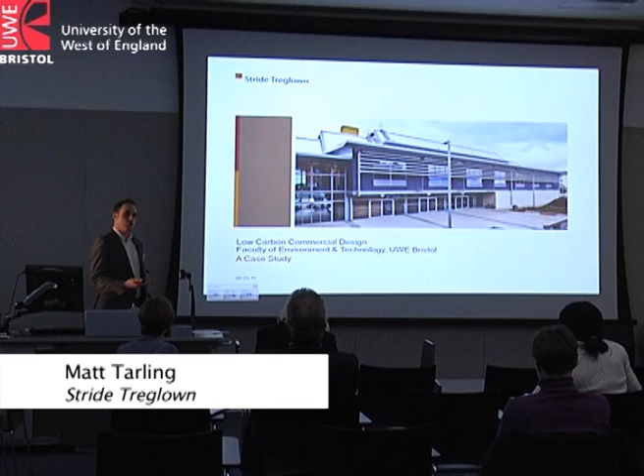This is a quick run through of the building and our experience delivering it in the context of current legislation, the budget constraints we had on the project, the time constraints, and also some of the constraints we had working with the university, not just the faculty itself, but the estates team as well, and some of the issues that arise from there.

So I'll do a quick run through. I felt it was worthwhile doing a run through the whole process so we could touch on some of the issues. I won't labour the point on too many of these, and at the end I've got some lessons learned that we're taking across into commercial office developments, and some future thoughts as well. Richard's actually covered some of what I was going to be talking about, which has given us a good intro into this particular talk.

The context here is that this is a building for the Faculty of the Environment and Technology. There's a lot of students here, and as well as housing the Department for Planning and Architecture, it was going to house the Product Design School as well. So a slight twist upon the types of students that were going to be using the space.

The site, Richard's talked about that to some extent, but really that sort of context we were dealing with, the mixture of buildings on the campus itself, the poor quality of some of the external environment, and some of that disjointedness that exists on the campus as well.

And clearly you can see that context having changed significantly during the time that the first phase was built, with all the student residences running around the site.

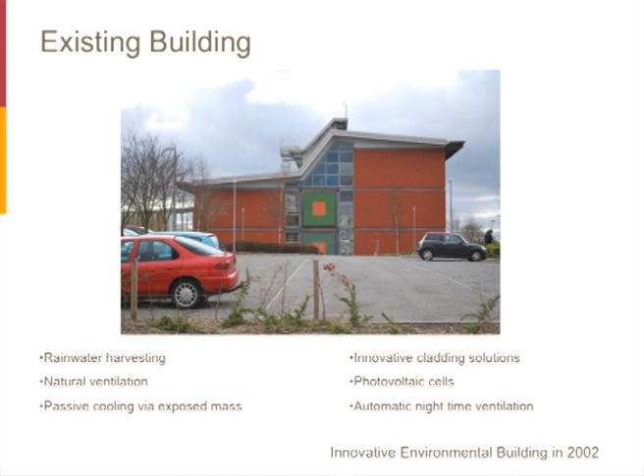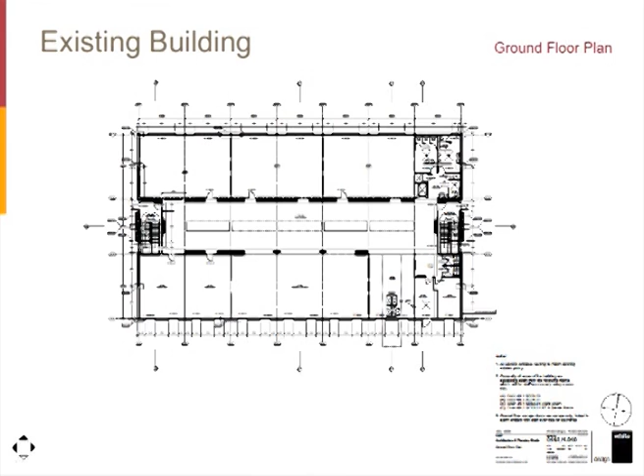There's a couple of sections through the existing building, just showing that atrium space that Richard was describing earlier, and that very, very simple plan, with a staircase at each end of that atrium space, light coming down into that central atrium, and then the bridge link coming through into the building.

One of the key things really was how you enter into that existing building and how we wanted to develop that as well. So I'll talk about that in a moment.

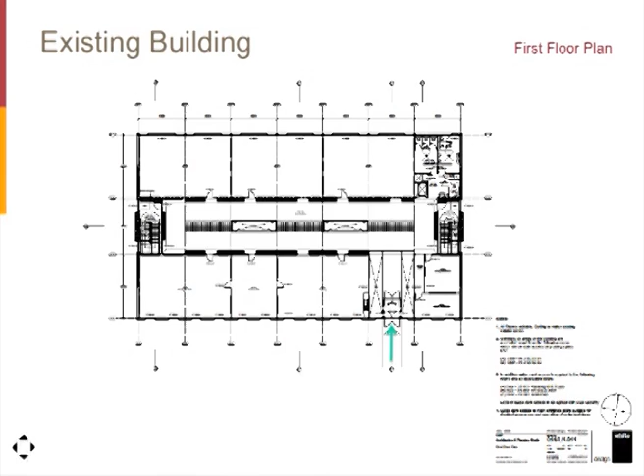So this just takes you up through those floor plans, and you can see that connection back through to the ground floor plan, and then the connection from the upper levels down through the atrium space as well into that large common area.

So just a little bit about our appointment and why we ended up designing the second phase building. There's an OJEU process for any publicly funded projects, as most people in this room know. The university has a framework of architects. We're one of 7 architects on the framework. White Design are not one of those architects. It went out to a mini tender bid to all 7 architects.

We responded to that with a team built up of consultants from the framework. We then submitted a proposal for that, attended an interview, and were successful getting through to that final stage. We were then appointed via various different forms, but that was really via the main framework, and the university uses the Scala form of appointment, which is very specific about the types of services they were looking for from us.

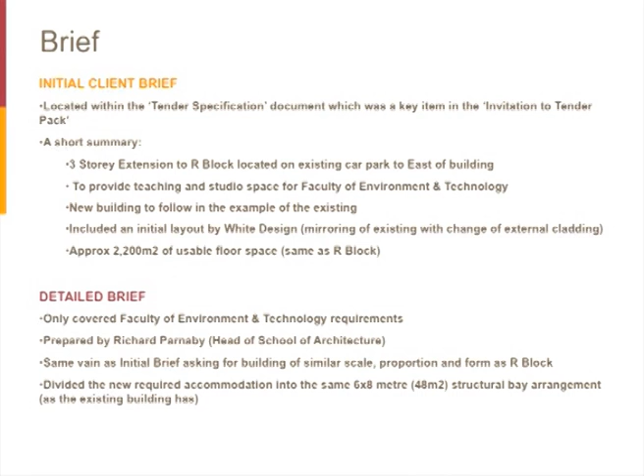Just coming onto the brief, the original client brief was very much about a replication of the existing building across to the site when we first bid for the project. As we got into the initial discussions with Richard and the rest of the faculty team, it became clear that it wasn't just a building for the School of Architecture, it was also going to include Product Design.

There are requirements for a lecture space, there are requirements for a cafe area. We started looking at some of the briefing issues as well about how the building could be knitted into the landscape.

That in itself then started to generate a change in brief, and started to develop some of those key issues around the energy and water strategy, trying to use the principles of lean, clean and efficient, and looking at opportunities to push new technologies the university hadn't used before that maybe could be used on future developments on the campus.

Also looking at the opportunity to use different materials on the building, so again there could be this compare-contrast aspect. And then there was also this aspect of the ability to learn through the building.

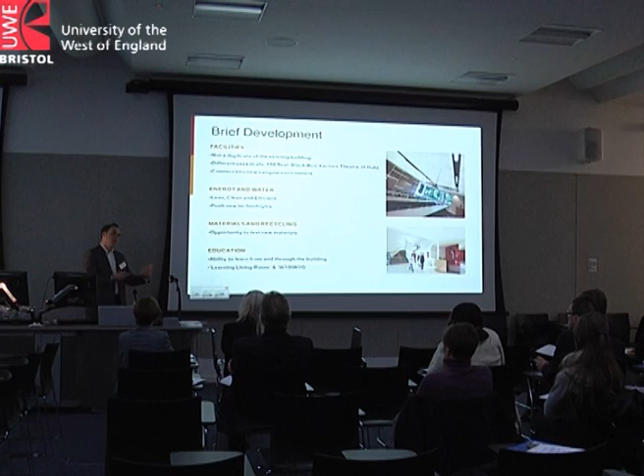Richard was very keen, as were most of the faculty at the time, to see whether we could actually construct the building out of a different frame solution - maybe this could be a concrete frame, compare-contrast to the steel frame next door. There were various reasons why that couldn't happen, but there were other opportunities for us to test some of those principles.

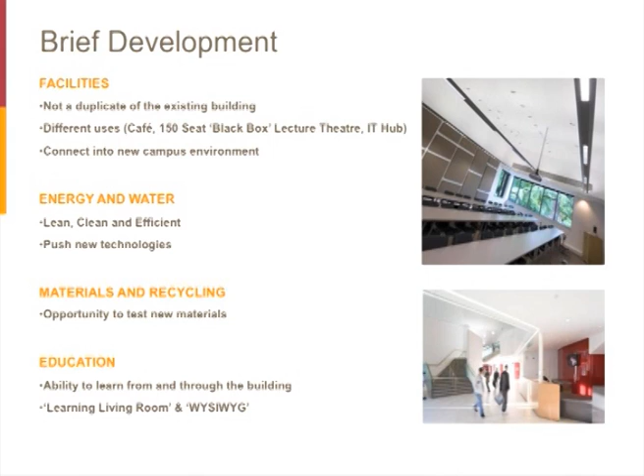That ability to learn through the building was going to be key, creating this learning living room area where more informal teaching and learning could take place. And also this principle of what you see is what you get - really stripped down building finishes throughout, so it's very clear how the building's constructed, how it's ventilated, and how the services work.

Clearly, from 2002 to when we started designing this building two years ago, the legislation context has changed significantly. Part L has moved on a couple of iterations, BREEAM has come into much greater prominence, the EPCs have come about, and WRAP as well, in terms of the recycling aspect, has risen in prominence - maybe not to such an extent as the other issues, but still something the university at an estates level were very keen to look into and understand.

So just briefly onto the site analysis - I think an awful lot of this we've covered already, but as Richard said earlier, the context changed from when the original building was opened to when we came to the table to start looking at the design, looking at those connections across the campus, and really starting to look at ways in which we could address the entrance to the building.

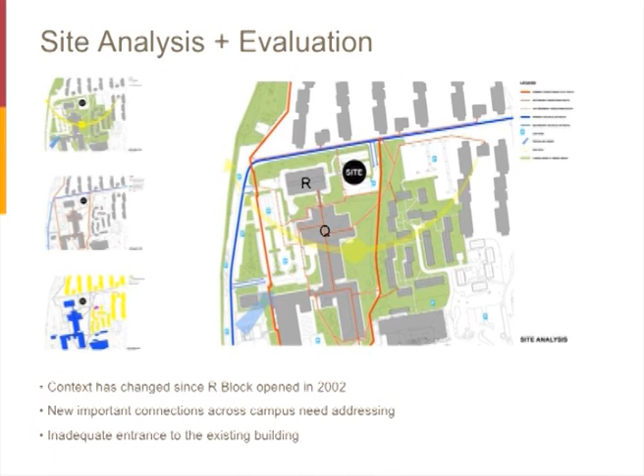When the building was originally designed, it was very much seen as an extension to Q Block, with that entrance coming through the bridge link in at first floor level. During conversations with various other people in the university that used the building, they felt the existing R Block was a little bit difficult to enter without feeling like you were straying into territory that wasn't your own, and part of that I think was coming across that bridge and landing in a new facility.

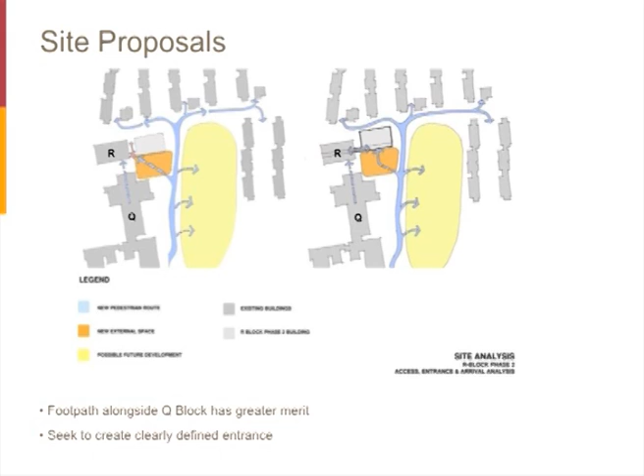So we wanted to look at a way of integrating the building within the landscape to a greater extent, looking at using the footpaths that go up the side of Q Block to a much greater extent. That drove us on to starting to look at the building orientation, how that building would work, and how the connections between the new building and the existing building would work - what were the opportunities there.

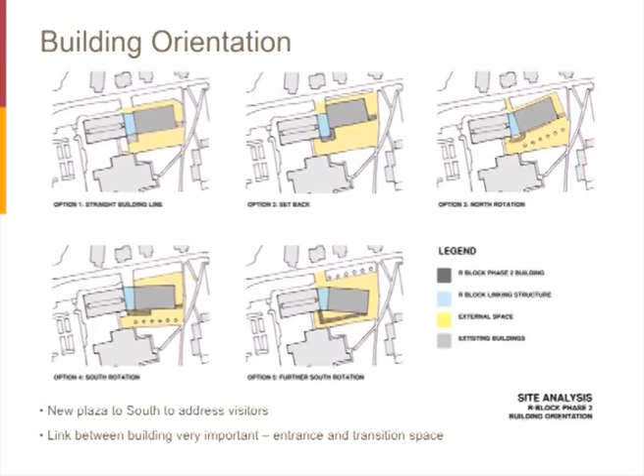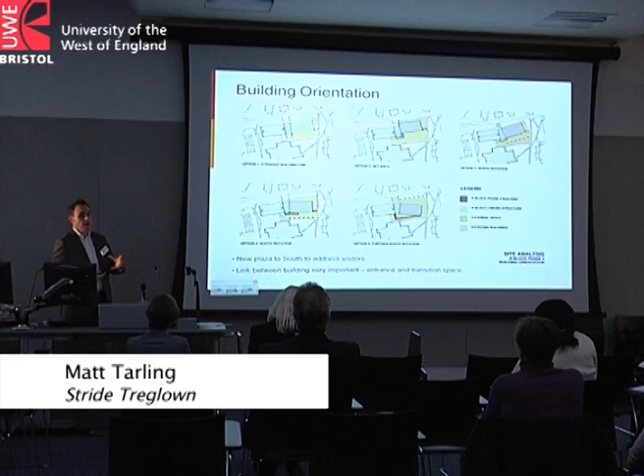We were looking at this opportunity to create a new south-facing plaza for the students, not just for this facility but for other users around the facility as well, and this glazed link between the two buildings that would allow a route through from the student resi into the plaza, then up some steps and back along into the rest of the campus, trying to knit the building into the rest of the campus.

So just very quickly, I'll go through the key stages of development for us. There were a number of iterations we went through, looking at different formats - the studio proportions and principles had really been well established on the first phase. Justin will talk a lot more in the M&E session about some of the principles, but at a very early stage we were really starting to look at how we could ventilate this building, how we could heat it, and what technologies we could start employing.

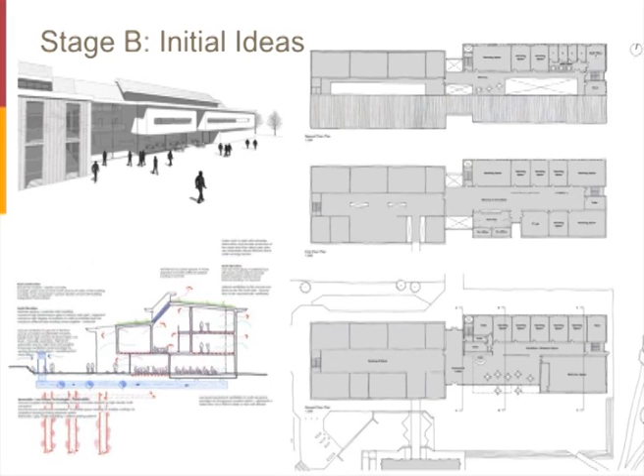And you can see from the section we were starting to look at whether sedum roofs were appropriate, how the ventilation strategy worked, could we pull in a ground ducted ventilation system, was there a way of combining some ground source heating scenarios with the building, as well as starting to look at how the building configured as well.

So that was at stage B. Stage C, our thoughts then moved on. We started looking at the glazed link in more detail, really rationalising those studio spaces and that breakout space, and looking at this natural ventilation principle.

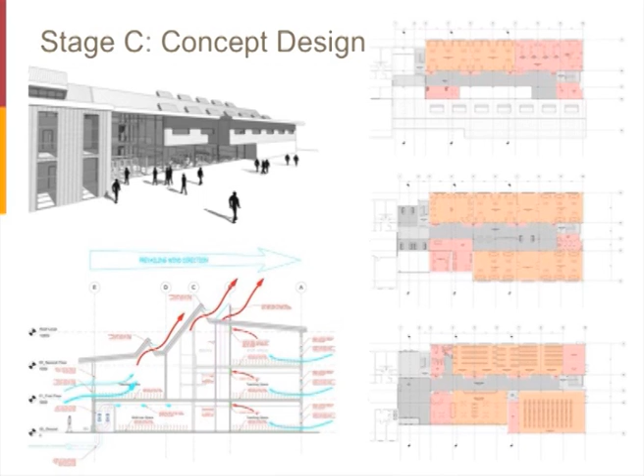The building is slightly different in the sense that there's a much higher IT use in this new building than there was in the original building, and some of the spaces in the original building were starting to suffer from possibly greater IT use that was causing some overheating. So again, the strategies were starting to look at a development on from the existing building. And that was really at stage C.

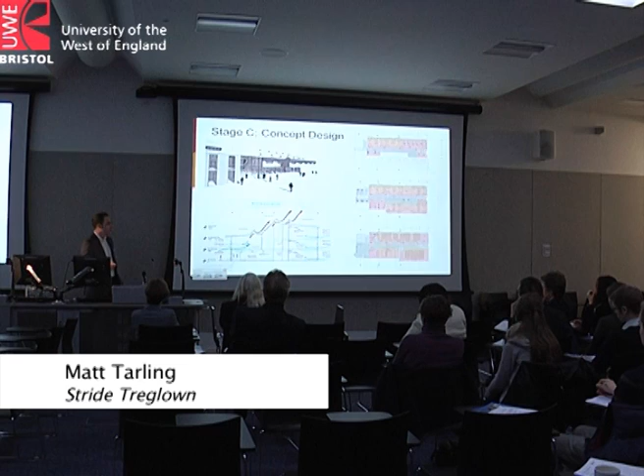And then at stage D, prior to planning, the section had really firmed up. You could see that between the stages we were looking at something a little bit more different to the original building, but as we progressed through the design, the section that exists on the existing building started to make an awful lot of sense, but things were tweaked.

The balcony levels were tweaked. The clerestory glazing was tweaked. The night purging doesn't occur in this building in quite the same way. So there are a number of subtle differences that occurred.

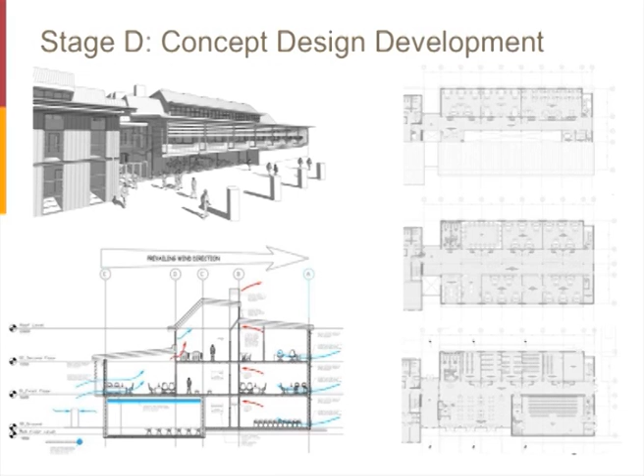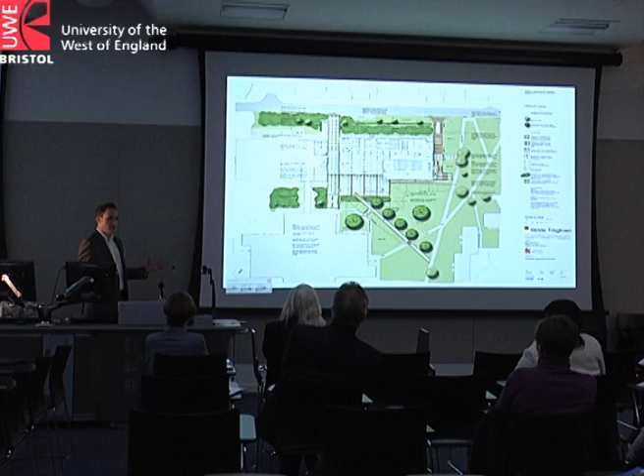And then the planning scheme, just running through that, this connection back into the landscape, how landscape architects worked with us very closely. By this point, we'd been appointed onto the project to actually define the master plan for the university for the next 10, 20 years, looking at integration of the HP site. So we were starting to look at a much wider context as to how this building sat into the landscape and how that connected back into existing pathways.

And then starting to look at the design in more detail, how the learning living room grew from something that essentially was a table with a coffee machine through to something that you see today, which is a much more defined cafe food offer and a breakout space there as well.

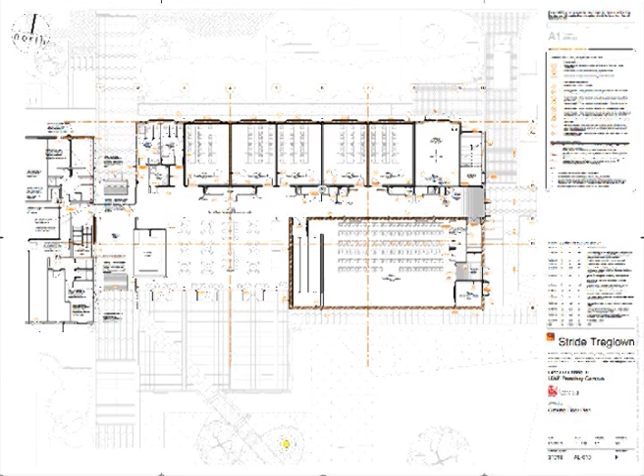I won't go into detail on the plan because we're going to do a tour around the building shortly, and if there are any questions then we can pick those up.

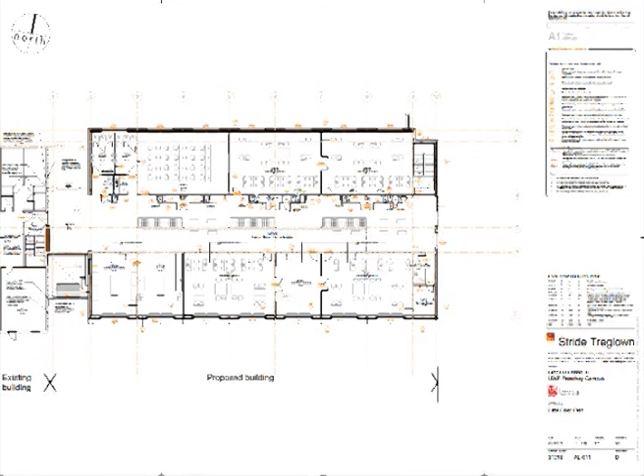So simply speaking, there are a range of studio spaces around a very similar atrium space. There isn't the connection between the first floor and the ground floor that there is in the existing, primarily because we have a cafe space on the ground floor and we wanted to use the layering of the building to allow us to create those levels of privacy as you go up through the building.

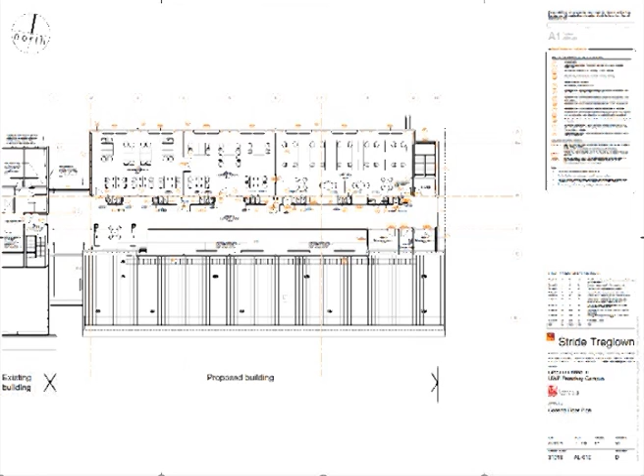So the ground floor is very much a space used for the whole university, and then as you move up through the building it becomes far more faculty specific. So when you get up to the top floor, we then have staff offices which are open plan, so we have around about 20 academics sharing one large open plan office area, and then we have the two postgrad studios for the School of Architecture as well.

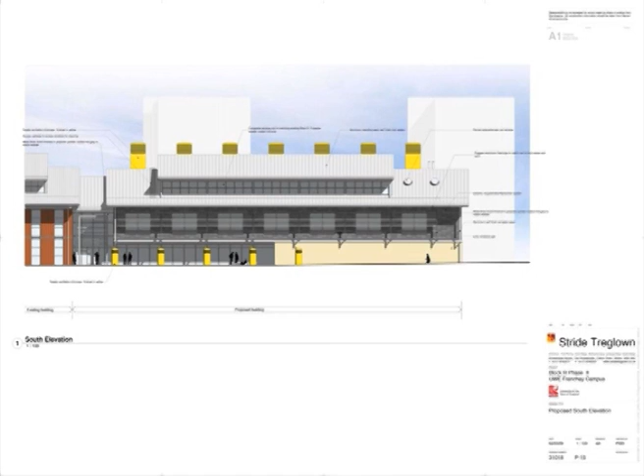And then the section you can see there, very simplistically, working in a similar way to the existing building, but with slightly more generous balcony areas, and we have our lovely dip down onto the lecture theatre, and I'll explain that a little bit later. And then our elevations, I'll come on to the makeup of the facades and the components we've used through the building in a moment, but you can see that's pretty much the building that we have today.

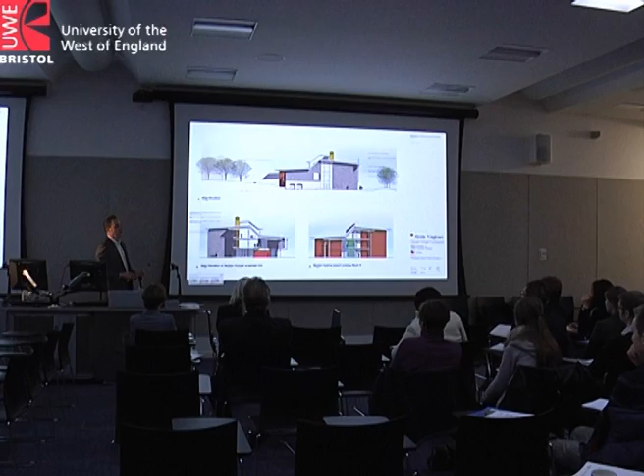And the rear elevation is a good example of how things moved on, looking at a slightly different elevational treatment to the existing building, and pulling through these chimneys, looking at that natural ventilation, trying to push that harder this time in this second phase building because of the higher IT use within the facility. And then some of the final images that we used for the planning application.

So sustainability and energy efficiency. I won't dwell on this because Justin's going to be talking about this in more detail, but needless to say, those four principles were really used throughout the process, and it was very much a stepping stone process to drive down to the solutions that we achieved.

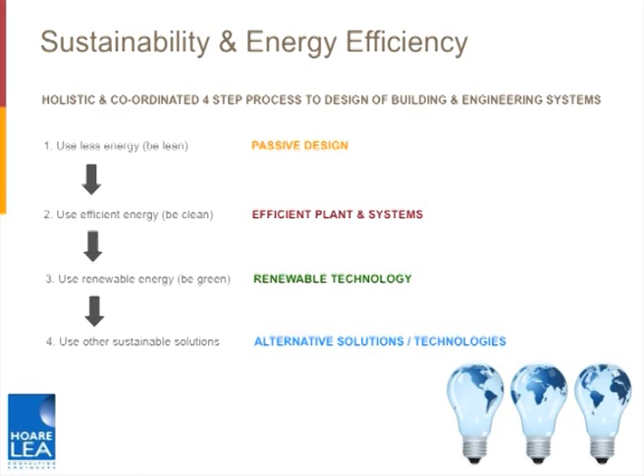And that then informed some of the building fabric. The principle of having some grills at low level that would pull in the fresh air past the radiators, and then the opening windows, giving that degree of occupant control and BMS automation as well, and trying to get that balance right.

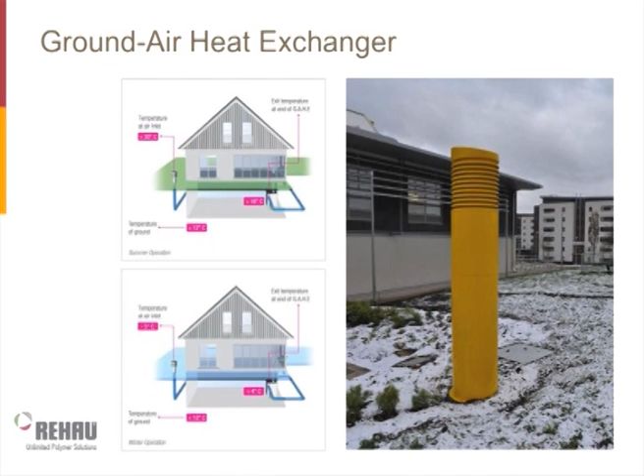That then in turn had an impact upon the internal environment with those teaching spaces, and also the way that the ground ducted ventilation system worked and how that was expressed architecturally. At an early stage we had a much greater array of chimneys, but as the technical process worked through, when we came to site it became apparent that the solution developed wasn't necessarily going to be the most efficient, and therefore that evolved.

Really, one of the key things has been that constant evolution, even when we're on site with some of these new technologies, that the so-called experts with the ground ducted ventilation system were not actually that expert. It was really starting to work through with those guys to try and develop that technology to the point where it was going to deliver what it needed to. There's some images there of the ducted ventilation system going into the building, and clearly you can see it operating in here at the moment.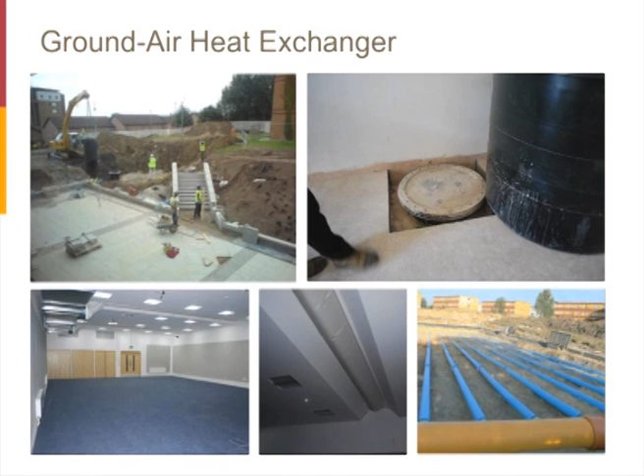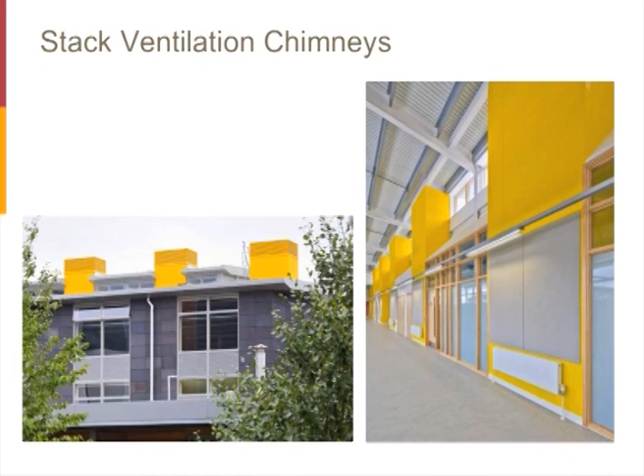Our chimneys, again, looking at that architectural expression of those elements that are ventilating the building and pulling those up through the building, and having that very clearly identified in the internal environment as well, so the students are very clear about what each of those components is actually doing, and starting to look at how those are expressed internally in the teaching spaces.

So I felt it was worth just pausing really on materials, components and the measurement aspect as well. We spent a lot of time looking at these issues, and that runs down this whole list of various different assessment methods and potential conflicts that exist with that, starting to look at how we were going to deliver this building within that context.

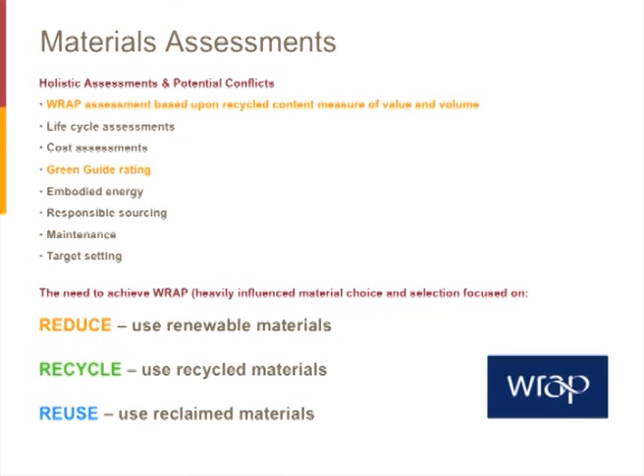So really it was looking at WRAP, the life cycle assessments, the cost assessments, the green guide rating, which is so critical to the BREEAM assessment, the embodied energy of the building itself, the responsible sourcing aspect referred to earlier, the maintenance aspects that estates were always very hot on, wanting to know what the maintenance regime was for particular elements of the building, and then the target setting.

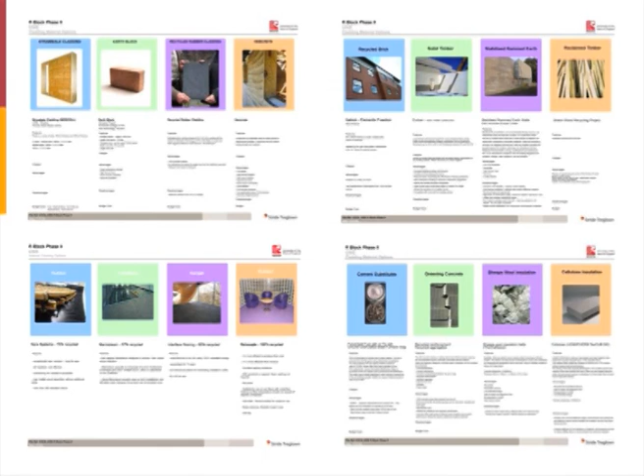And then this need to achieve the WRAP requirements, which specifically related to the recycled content of components. The university were keen to look at that in more detail as a trial on this particular building. That led us on to looking at the reduce, recycle and reuse aspects of the project as well. One of the tools we used was starting to look at the different materials we could use within this facility to clad the building and finish the building, whether that was flooring or external cladding. There's a whole series of sheets that started to look through those issues.

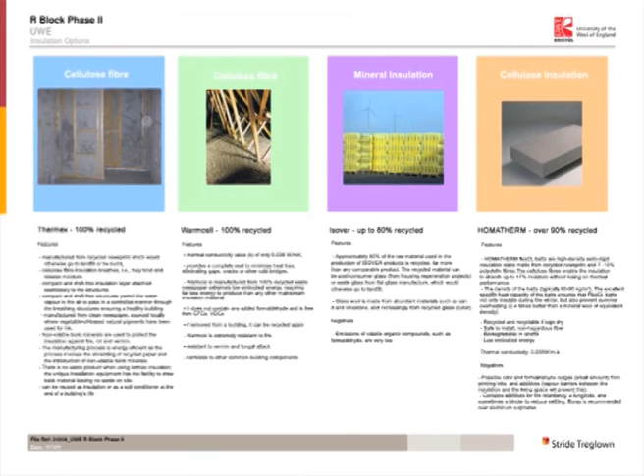And then we started playing that back into the equation with the QS, looking at the costing implications of some of these different choices. It was everything from comparing cellulose through to mineral insulation, looking at the pluses and minuses associated with that, and where the green guide rating sits as well. It's not always that the most sustainable product is actually going to give you the best rating for the BREEAM, and there's a constant balance to be had there.

So in terms of the recycled use of materials, the UWE Estates team set a target of 10% of the total value of materials used should derive from recycled and reused content, throughout the entire building. That set us a very clear challenge through the process to set some targets and to start looking at materials that could achieve some of those benchmarks.

One of the most important elements for us was the cladding. We spent a lot of time looking at different options, be it timber through to brick cladding, through to metal cladding, you name it. We looked at rubber, recycled rubber. We pretty much explored most options, and it was really through discussions with Ibstock, because they had supplied the cladding to the first building, that we wanted to explore things further.

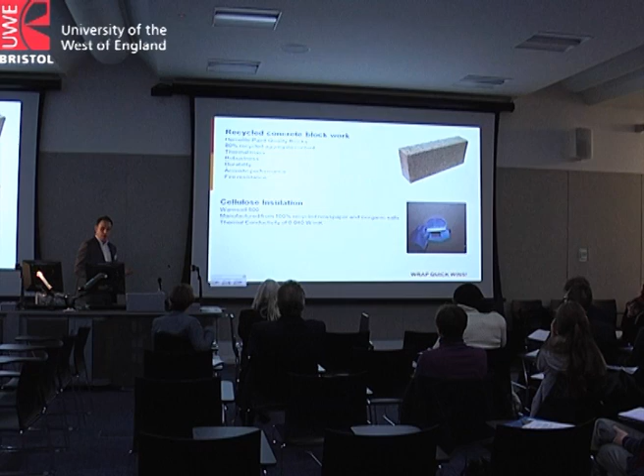And we came up with this product, which is actually a recycled tile. So what this uses is slate dust and clay dust from the factory floor at Ibstock, and then that's reused and then put into a tile format and then fired.

And the variety that we achieved on our elevation with the different colours was through the firing process. So what we have on the final elevations of the building are 4 different colours, and those are achieved just through different periods of time for firing the tiles themselves.

Now, what this achieved was a 94.7% recycled content for the tile, which was fantastic. But clearly, when we talk about low carbon, there is a carbon issue in the sense that we've had to fire those tiles. We have reused a material, but again, there is a firing process to be balanced into that.

The steel frame, we actually achieved an 80% recycled content on the steel frame for the building. The aggregate, 100% recycled content. The blockwork I'll come on to in a moment, and the flooring, 37%. So they're just a snapshot of some of the areas that we looked at.

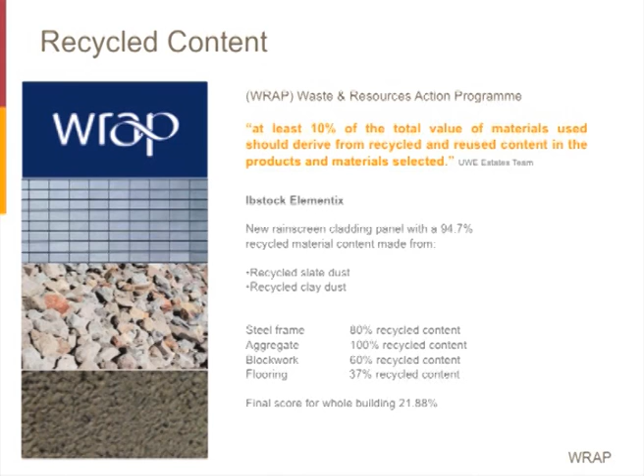And then the final score that we achieved on the building with the main contractor was 21.88%. So we set ourselves a higher target from the outset, didn't really share that with the rest of the estates team. We wanted to keep that to ourselves until we knew it could be achieved. But we set that benchmark with Willmott Dixon to try and actually push that target higher.

And just going through some of those key materials, the recycled cladding was a key element of that. That was the first time it had been used in this country, and is now a product that is marketed by Ibstock. There were issues with the installation of that in terms of the alignment of the tiles and the torque settings with the fixings at the back.

So it was a learning curve again for not only the university, but also the guys installing the product and for Ibstock. So Ibstock spent a long time down on the site. Recycled blockwork,

is a big issue. The more we looked into it, the more we realised that it wasn't a straightforward matter of just picking the block with the highest recycled content. The higher the recycled content, the rougher the finish of the block. Therefore, chances are you're going to have to plaster that particular block, and suddenly you get into the embodied energy of plastering and finishing that, and the additional trades and the additional costs of that. So again, getting that balance right.

The blocks we used had 60% recycled content, so that allowed us to have a paint grade block. We could get up to a much higher percentage of recycled content, but it would have meant we would have been plastering that. And clearly the durability, the robustness, the acoustic requirements of that were absolutely key. And when we walk around, you'll see there's a boxing detail up at high level that deals with the acoustic, something that didn't exist in the Phase 1 building, and again, a lesson learned in the Phase 2 building.

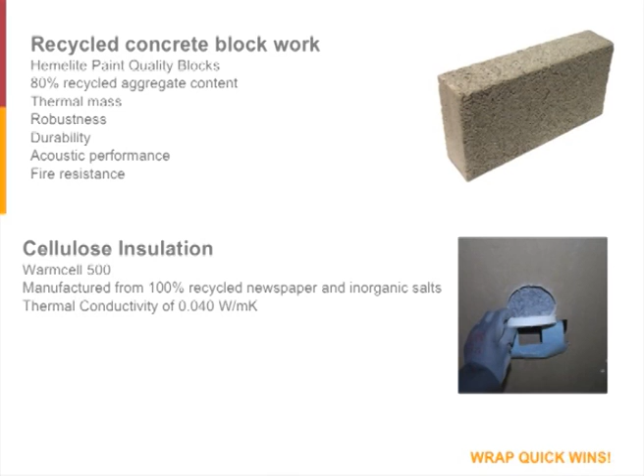The insulation, the Warmcell insulation, again, 100% recycled newspaper, but again, there were lots of debates about what chemicals were being used within that Warmcell. Was there any particular issues with that? And again, there was a lot of debate about how that was going to work and the installation process. As it is, it worked very well on the building, and that's what we have in the majority of the envelope.

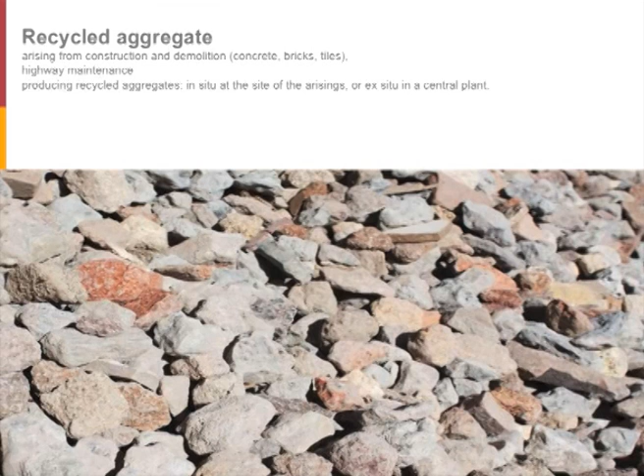Recycled aggregate, I've mentioned that. And one of the key issues with that is using that in a local context as well. To achieve the BREEAM points on some of these credits, you need to have that actually achieved from a very, very small radius within the site confines. So again, that's one of the key components that starts to set really your parameters, trying to use the local materials, and to some extent, it's what's available at that particular time.

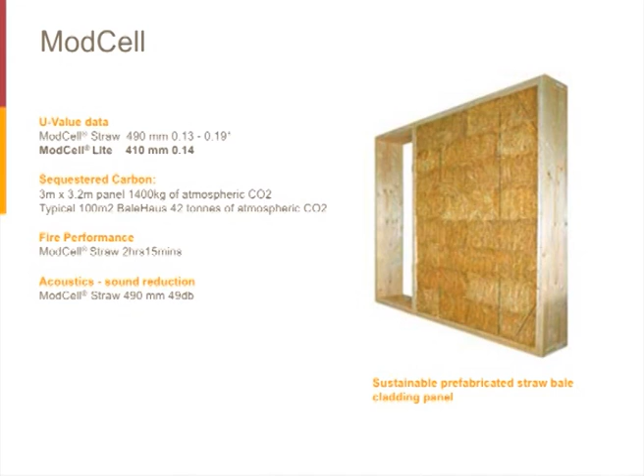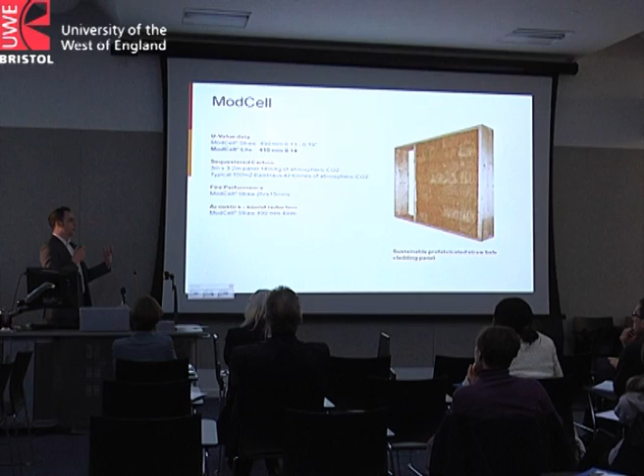Reduce using renewable materials. The ModCell straw bale cladding had been used on the Phase 1 building, and there was, I think it's fair to say, a desire right from the outset to see whether we could use it in some way on the Phase 2 building, as it had been born out of Phase 1. We spent a lot of time looking at the options, whether we could clad the whole building in this, but the nature of the studio arrangements and the fenestration we were looking at really wasn't going to work particularly well with the ModCell around the main studio building.

But in this environment, in the lecture theatre, which was deemed to be a black box environment, it worked very well. So what we have cladding around us at the moment is the ModCell panel, which clearly achieves a number of things, particularly in terms of CO2 emissions. But what it doesn't allow us to do is get any benefit within our WRAP or our BREEAM ratings. So whilst we have a product that by its nature is reasonably sustainable, it doesn't actually contribute to any of the measurements or assessments we were using to assess this building with.

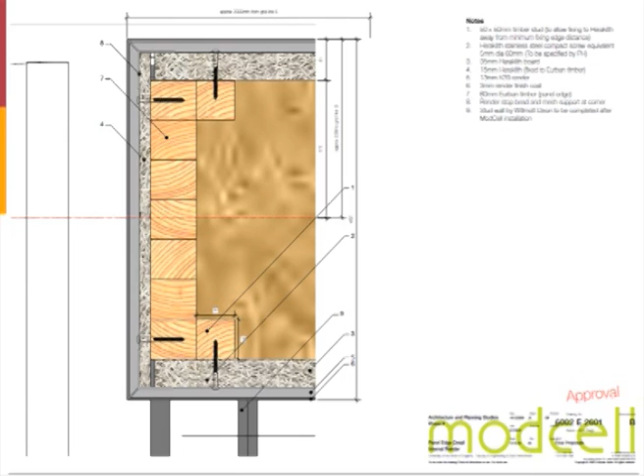Just a couple of details. This was a slightly different ModCell panel to that used on the original building. This was the ModCell Lite, which actually has layers of straw board on either side, and then we're finished off with our pin board and then our lime render on the outside. So it's really an evolution of what was used on the first building.

And again, the original intention was that this was very much going to be a modular solution, that we would cut down on waste, we would have all our modular panels coming to site. The reality of that was that we probably only had two or three panels that were absolutely alike. By the time we'd taken into account the cutouts for the ventilation system, arrangements with the steel, arrangements with fire exit doors, with storage, with openings through into the main building, and coordination with the steel frame, it then meant that we didn't have that many modular panels.

The beauty of straw, of course, is that it's very easy to cut down to those sizes, and the same is true with the timber as well. So the level of wastage was relatively small, but it goes to show again that unless you're designing these things in right from the outset as an absolute system, you're not necessarily going to get the absolute full benefit.

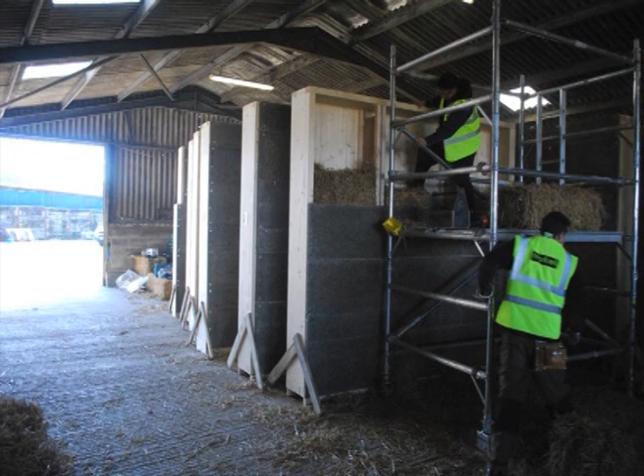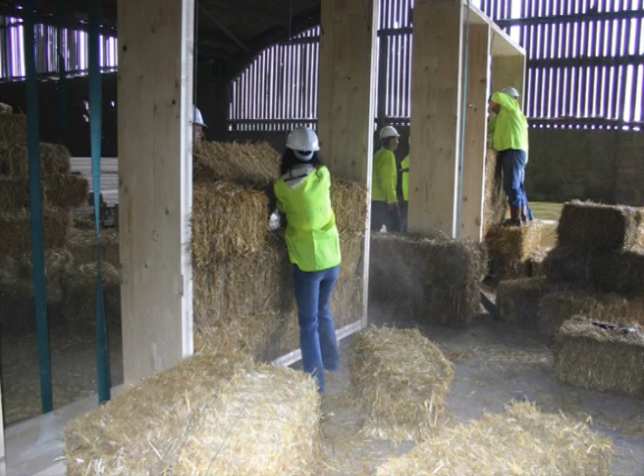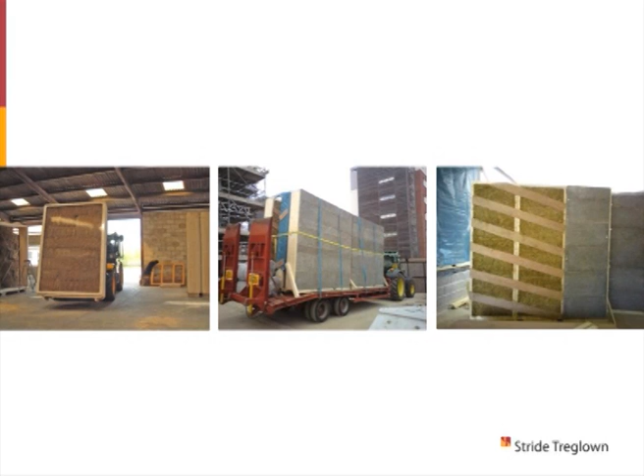These are some photos of the installation process. This was all done very locally, just up at Failand, across the Clifton Suspension Bridge. We conducted a number of visits there, took some of our students from the office, a lot of our UWE students came up with us as well, got involved in the process, and we were recording the process as the panels were brought to site on the back of the trailer with the tractor pulling that. So again, the process of pulling that to site, reducing that carbon footprint, reducing the time it takes to pull those materials in.

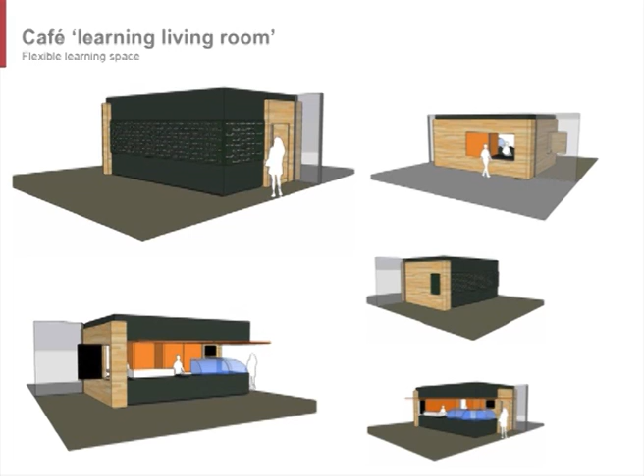So then moving on to reuse, we really wanted to explore opportunities to reuse a material that had been used somewhere before. And the cafe pod gave us that opportunity. We spent a lot of time looking at how the cafe pod in its own right would act as a piece of furniture sat within the building. And then what opportunities could we use to get student work involved in this? And could we get a material?

What we decided was to use a timber, and it's actually reclaimed timber from a cheese factory in Somerset, and we've reused that to clad the cafe. We did talk at one time about leaving it unsanded, where you can still see the cheese markings, and had various discussions about how that would work, but we decided to actually clean the timber up, sand it down, and install it.

And as you walk around, you'll see there are a number of issues with that in terms of the movement of that timber. Gaps are opening up. We had issues with the subcontractor — the subcontractor building this went bust partway through the process, and there were a number of challenges that arose as we went through the design process. So again, not without its issues, but we wanted to trial this and look at what the implications of that were.

Once again, none of that could be used in any of the assessments we were assessing the building upon, but it was a worthwhile exercise that we felt worth testing. And that was before the timber started its lovely shrinkage.

Then this is the front elevation. Again, a few issues with this. The final execution of the detail by the subcontractor wasn't quite what we'd originally envisaged, but in essence what we were trying to achieve here was get either some student work or something into the design of the building that had some resonance with Bristol and with the university. This was a plan of Bristol done in the style of the Nolli plans, which was then laser cut into the screens themselves.

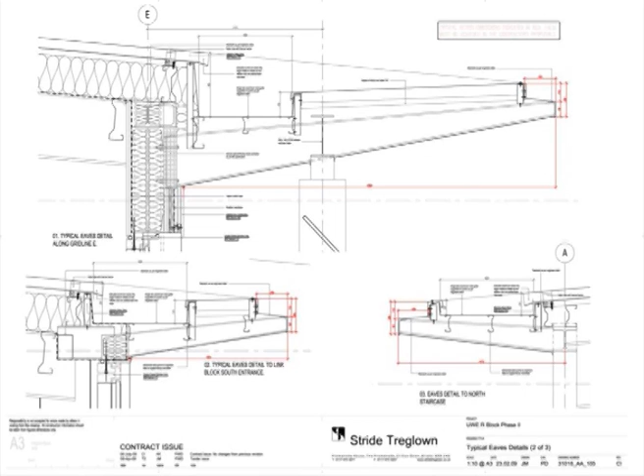Really, it was about trying to define the things that really matter to us, the edge details, the elements that you see, the specification of key components, but still allowing the contractor to develop some of the detail further on down the process. I don't think I've ever had a project with so many site visits throughout the course of the project.

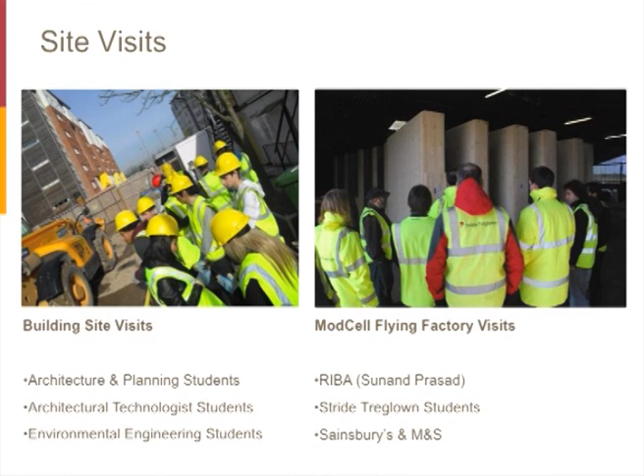We had numerous visits, understandably, for the architecture and planning students and the technology students and the environmental engineering students. We had the RIBA president at the time, Sunand, come round as well. We had a number of our own students coming around, a lot of them ex-UWE students in their own right.

And then with Willmott Dixon, we took Sainsbury's around, looking at opportunities that we could deliver with Sainsbury's in terms of the straw bale cladding and the low carbon options, and the same with M&S, looking at low carbon stores.

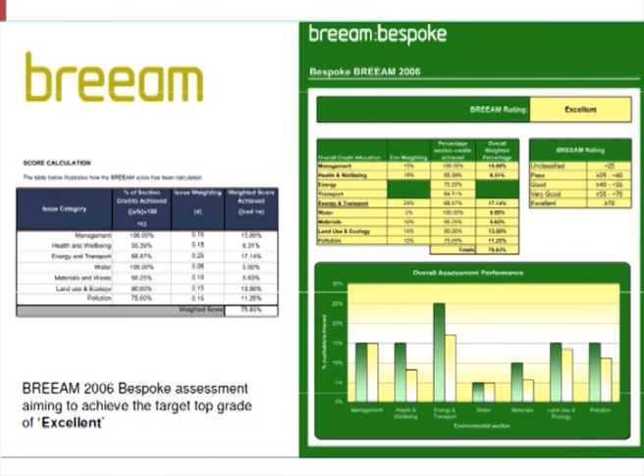Measurement - just briefly on measurement, I mentioned earlier we undertook the BREEAM assessment. We have our own BREEAM assessors in-house, which helped in the process, but as is always the case with BREEAM, there are issues associated with that.

We had a score of 75% at pre-assessment stage. We ended up with a final score that was actually just shy of 72%. Credits were lost, credits were gained. Again, part of the process really, but it was a particularly onerous thing to really try and achieve that excellent rating.

A number of elements - although the building's fully naturally ventilated, because this room here doesn't have windows, it doesn't count as a naturally ventilated room, despite the fact we have the ground ventilated system. So we lost our credits on natural ventilation. Again, BREEAM has a very, very specific way of assessing credits, and that has implications.

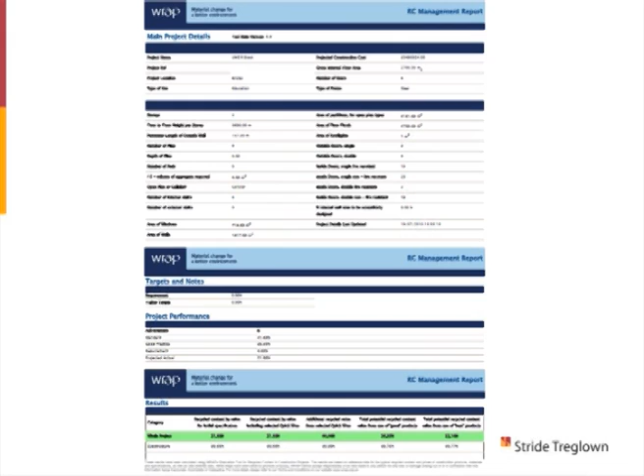The boiler for the building uses recycled chip fat from the university campus, and again, BREEAM initially were not willing to accept that as a possible renewable source, and it took an awful lot of conversation with us and the BREEAM advisors to convince them otherwise. The project finally achieved the 22% that we mentioned.

There's just some photos here. I'll just flick through these very quickly because we're running short on time, and we'll see these when we go around on the tour in a moment.

And some of the buildings in use there. I'll finish with some commercial office case studies, really showing some of the learning going across our business. At StrideTreglown we cover pretty much every sector that exists. I'm part of the education team, but our commercial and healthcare teams all relate back to one another and communicate, so we have shared learning with green groups existing through the business.

One Glass Wharf is a building down at Temple Quay in Bristol that we completed relatively recently. Burges Salmon are now the occupants there. That achieved a BREEAM Excellent - not an insurmountable task, particularly regarding some of the cooling requirements for this building. It actually uses cooling from the river to help cool the building as well.

Babington Road, some of you may know this building - South Glos offices that we completed probably about 6 months or so ago. Again, another BREEAM Excellent building, utilises a number of different technologies.

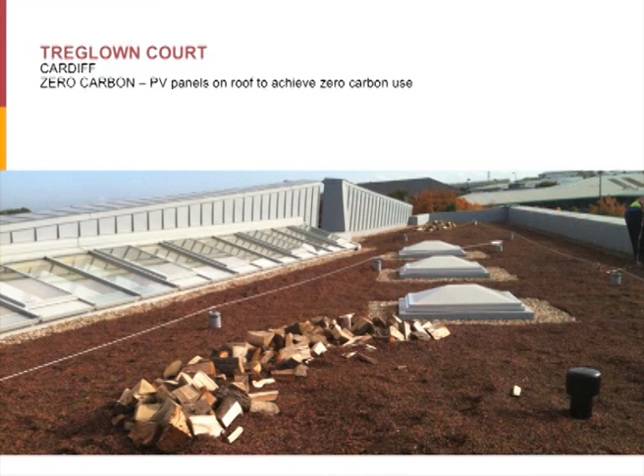That's using a number of different technologies and finishes within the facade, including a brown roof up on the top there. And we're currently looking into using PVs on the roof as well to achieve zero carbon.

Again, what does zero carbon mean? Well, for us on this particular building, it means zero energy coming into the building. So the feed-in tariffs are allowing us to balance the investment costs for the PVs. We're looking at a payback period of about 7 to 8 years on the PVs we're putting onto that roof, and that's costing us in the region of about £50,000. We also have a biomass boiler as well as a number of other technologies, plus a remarkably low air tightness result. So a number of things are combining there.

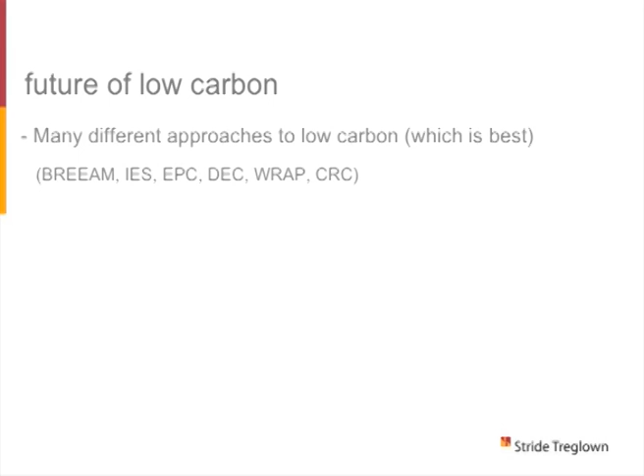Just to finish with some future thoughts - clearly there are so many different approaches. What is low carbon? I'm sure that's going to be discussed this afternoon. But in terms of assessments, how do we measure it is such a big issue, and how obsessed do we become with that measurement process? Is it BREEAM? Is it using the IES model? Is it getting an EPC, a DEC, using the WRAP system? Does it tie into our CRC? Who knows? For our design approach, the key thing is keeping it simple, trying to reduce reliance on complicated systems, but where the opportunity arises, testing out new ideas on small-scale opportunities.

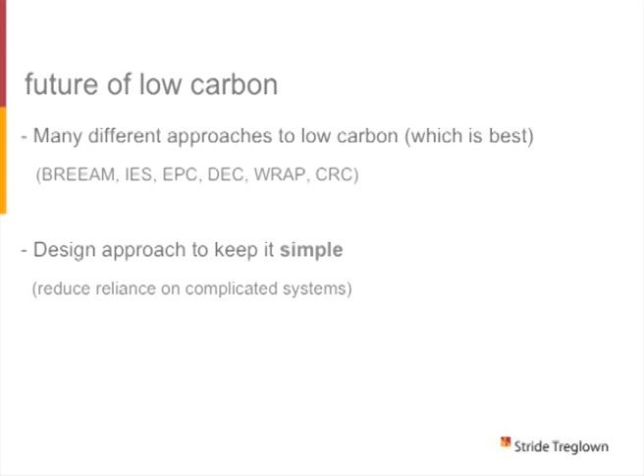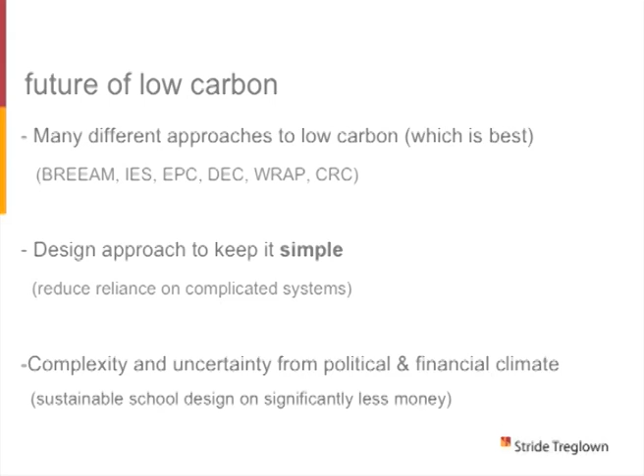And then the last thing is the complexity and uncertainty from the current political and financial climate. We're seeing it more and more, particularly with the new schools projects going forward. Now that Michael Gove has put a halt to just about everything going on in schools design, the agenda seems to have changed, and sustainability isn't quite where it was at the top of the pile, and slowly seems to be dropping below the radar. With a 40% reduction in build costs being discussed at the moment, one questions where carbon, BREEAM and environmental assessments are going in that respect - it's about what we can do on that lower budget. So that pretty much concludes it, almost bang on time.